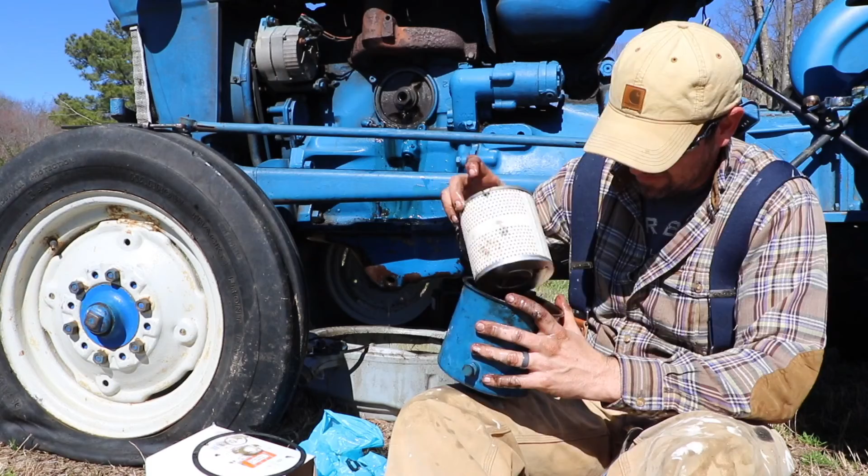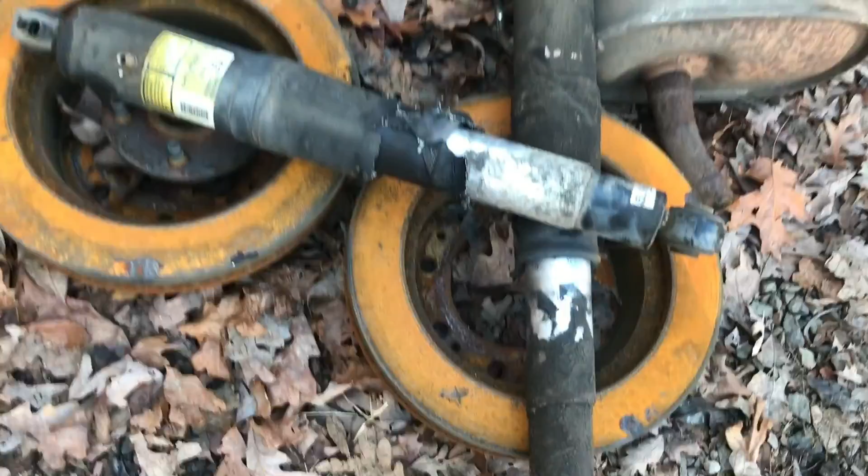That's pretty amazing. Yeah, it is. Yeah.

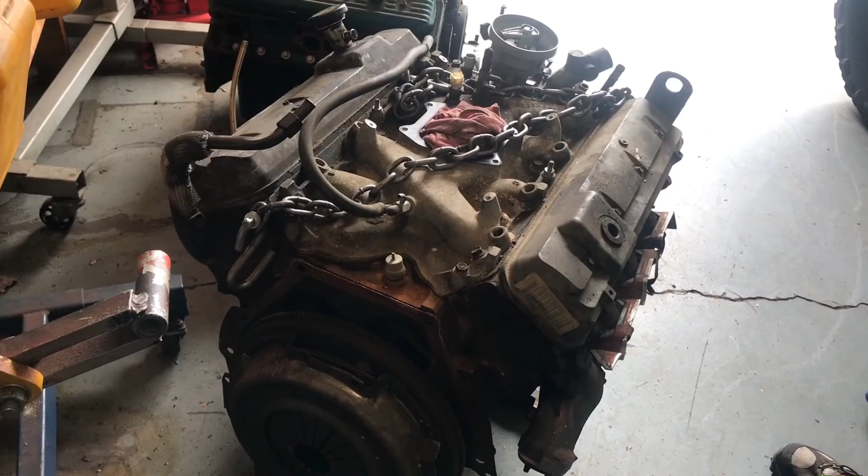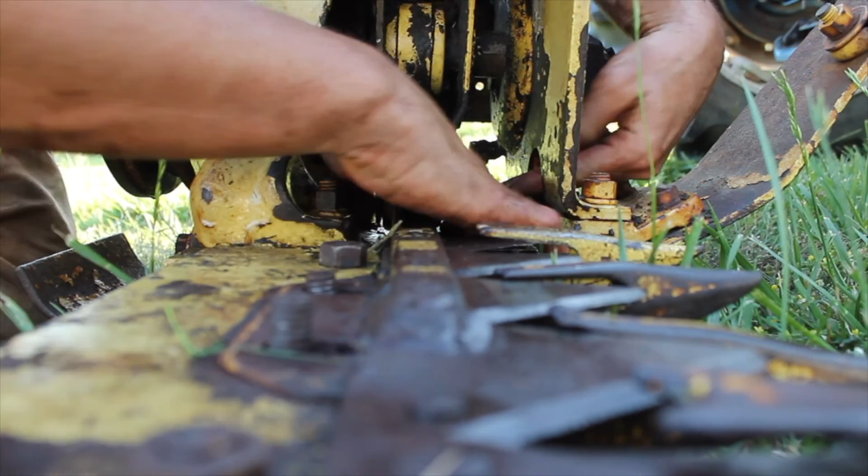Okay, put that on there. Be ready to go. It's February here, so we're going to be back into the growth season next month. We need to make sure everything is working top notch. We don't have enough money to pay for repairs or replace things, so doing maintenance and replacing any worn parts is critical this time of year.

Today I wanted to go over tractor and equipment repairs and how to find parts, because if you're like us, a lot of your equipment is from the 1970s, which predates me, and it can be very tricky to learn how to find the parts, nonetheless try and figure out how to fix something.

I wanted to go over some of the resources we've found useful in buying parts and also how we go about learning about our equipment and figuring out how to make repairs to it. I started going on Amazon to look for certain parts, and it amazed me what I could actually order off of Amazon. I didn't think you could order this stuff.

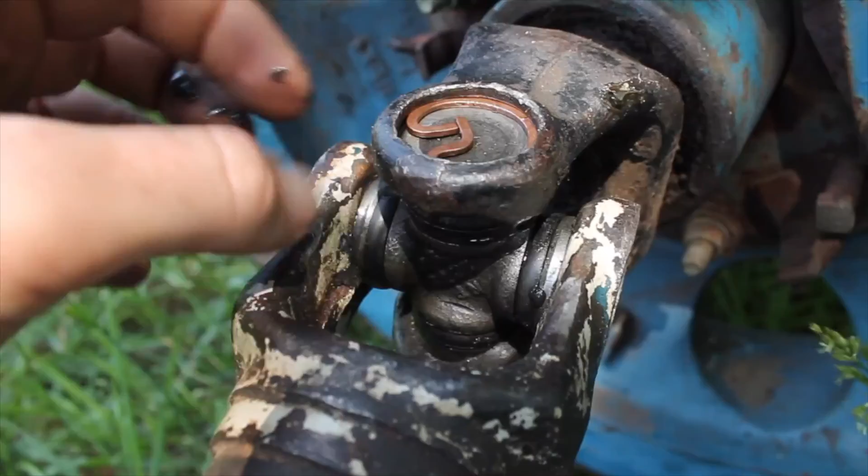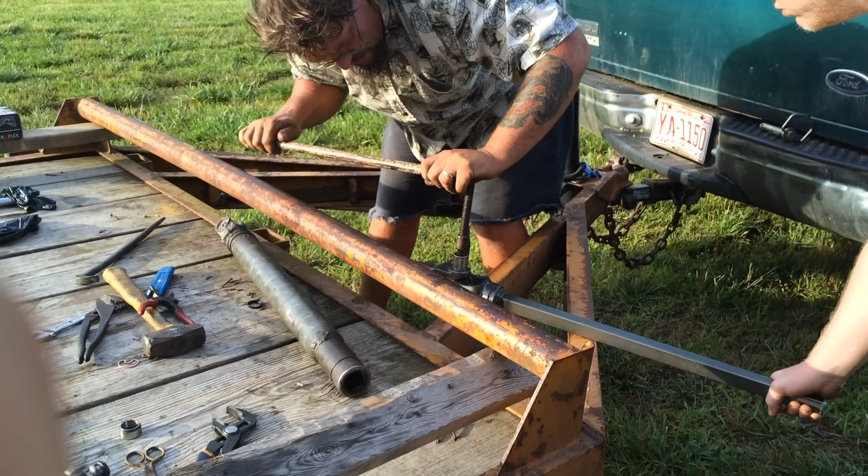For a PTO driveline shaft, we have a brush hog which I've beaten up over the years. I finally destroyed the cross bearings on both ends of the universal joint, and the yokes are a little torn up. By the time you price in all those parts, it could be fairly expensive, over $100 to make those repairs. If you were to go to your local tractor supply store and just buy the entire shaft, you're looking at $200 to $300.

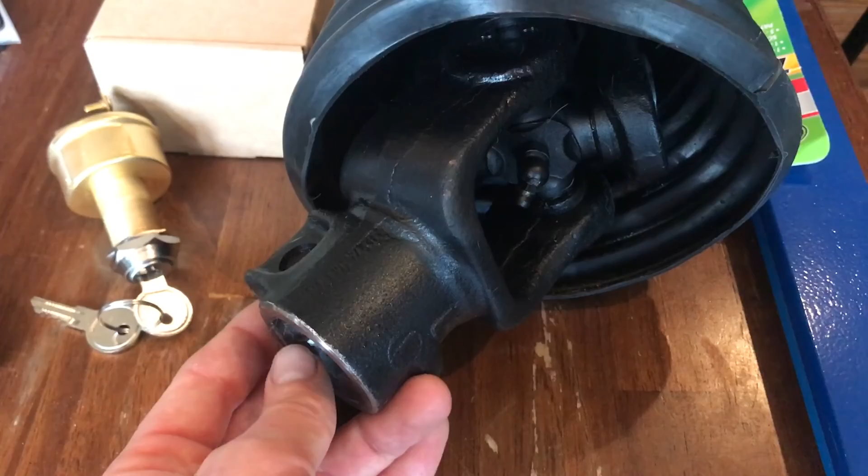But when I got on Amazon, I found one that will fit our brush hog, and it's virtually the same thing, same size, and it was only $139, which compared to what I would have spent going to Tractor Supply and buying the parts and pieces, or Agri Supply to repair the old one, it's the same amount of money and I got a whole new piece.

Stabilizer arms - I'm happy about, but not so happy about, the stabilizer arms I ordered don't match. One is left, one is right. They were from the same company. This is actually the one that I thought I was ordering, which is more of a universal bar. You don't always get what you think you're going to get when you're ordering off of Amazon.

The other thing we got off Amazon, and this I would have figured you could have gotten off Amazon, a tire patch kit for $5. A Ford tractor PTO seal - this is literally right around $10, maybe less on Amazon.

We also ordered an oil filter through Amazon. It comes with new gasket seals. This whole little kit here by Fram, $12, Amazon.

Our chainsaw has been broken. The carburetor is no longer able to hold its pressure. They wanted over $100 to repair it. We got this whole kit with the carburetor, all the necessary pieces to fix it. It even has a little adjustment tool. But this entire kit is about $25.

We're not just going to Amazon for tractor parts, but we're also getting stuff for our chainsaw.

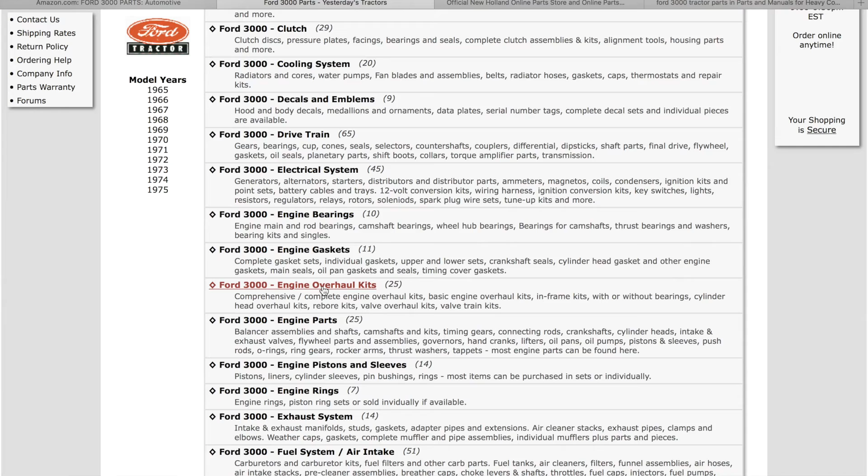Now, another website that I go to for parts on an older tractor is a site called Yesterday's Tractors. It's got tons of information on older tractors. You can get the original shop manuals for most of the tractors - for old tractors, that's why it's called Yesterday's Tractors - they carry hundreds of aftermarket parts. I mean, you can't go wrong. They've done a great job of putting together their catalog. It's very easy to use. It's not going to be as cheap as Amazon, but you can order from Yesterday's Tractors with peace of mind that what you're ordering is going to be the right equipment for your tractor.

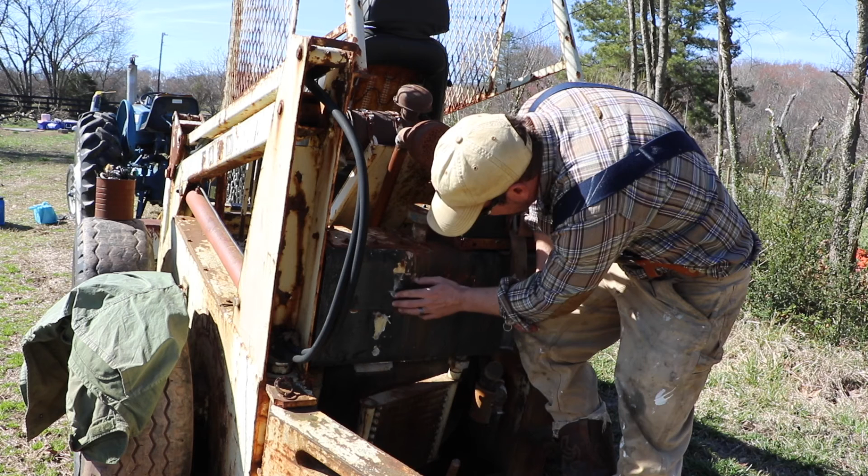Another thing, and I just figured this out trying to find information and parts on a Ford CL 340. They made those between 1971 and 1973, a very short period of time. I was having a really hard time, and I've used this other website several times. I haven't actually ordered parts from it, but I'm able to find the parts I'm looking for and find what the original part was, then figure out what parts have replaced that original part over the years, and track down the best parts that I need for it.

If you have a piece of equipment that isn't listed on Yesterday's Tractors and you're trying to figure out what that random piece is, the site is called partstore.agriculture.newholland.com. This is for Fords, New Hollands, anything that's kind of been under that manufacturer's umbrella. The older Fords you get most of their parts nowadays through New Holland.

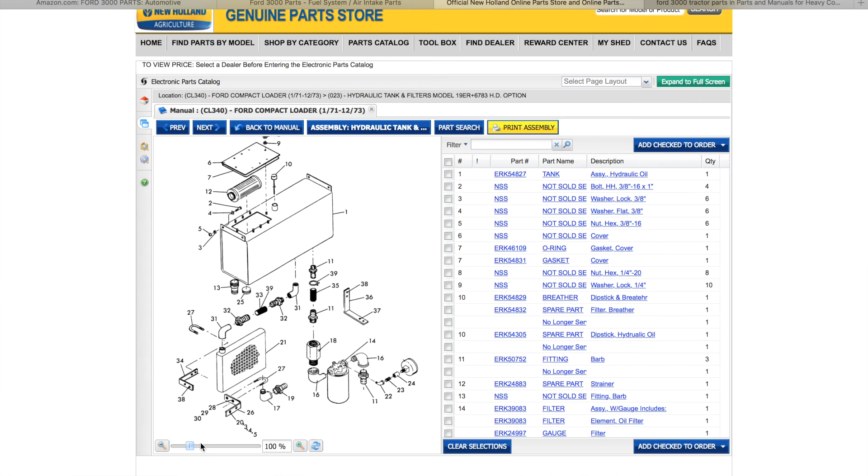If you go onto that website, they have very detailed diagrams you can go through and pull up, whether you want to see the engine parts or whatever part it is you're working on. If you don't have a shop manual but want a good idea of how something was supposed to be built, because a lot of times these machines have been modified, you can go onto that website and pull up entire diagrams of whatever section you're working on.

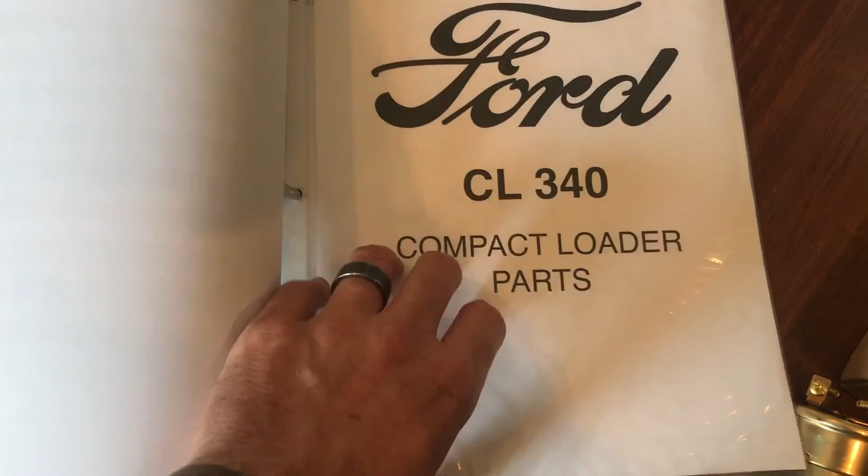Decipher which part is which, how the system operates, etc. If you haven't already done so, and this is something I just started doing, I have a binder with our main pieces of equipment that we use on the farm. This is Ford, so in here we have the 3000, the CL340, and our 1993 F250. I keep anything I'm researching to repair, or shop manuals, in here so I can always skim through and find parts.

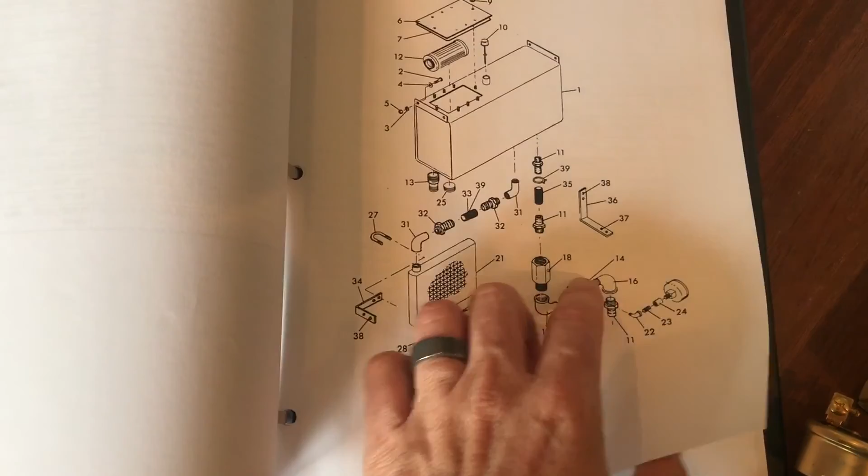On the New Holland website I mentioned, where you can find parts diagrams, I keep diagrams of areas I feel I'm either going to be working on or need to work on, all in here so I can easily flip to them. I don't have to worry about having Wi-Fi outside to look something up on my computer. A little old school that way.

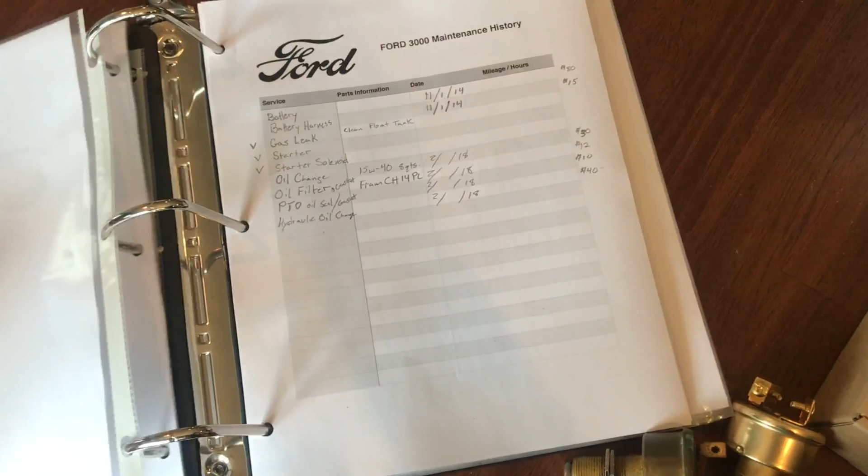I also keep work logs of anything we've done to any piece of equipment, the date we did it, what parts were used, to help me gauge upcoming maintenance, what something's going to cost, where I found the part, and what part number I used, because sometimes we're using parts that weren't original. Keeping your own manual that you're building as you do repairs is kind of an essential thing.

The other thing I'll do is put down the date, the cost, any information I have on parts, what the repair was, and since we do videos, if I did a video on it I'll put a V next to it for my reference, so if I have to do it again I can go back and see what I did, because a lot of times I'm just figuring things out. I don't really know what I'm doing.

The other thing you're going to need if you're working on your own equipment and you're not a mechanic is shop manuals. This is a Ford 3000 shop manual. The I&T shop manuals, like this one, you can sometimes get at Tractor Supply. This one came from Tractor Supply. It's a Ford 3000, a relatively common tractor. Even though it's from the 1970s, a lot of people are still running them.

There's another website I like called gensales.com. That's where we found the CL340 manual, which is a rare machine as far as finding parts and manuals for us. Gensales has a shop manual, and then if you go to yesterdaystractors.com, they also have, for a lot of tractors, the original shop manuals.

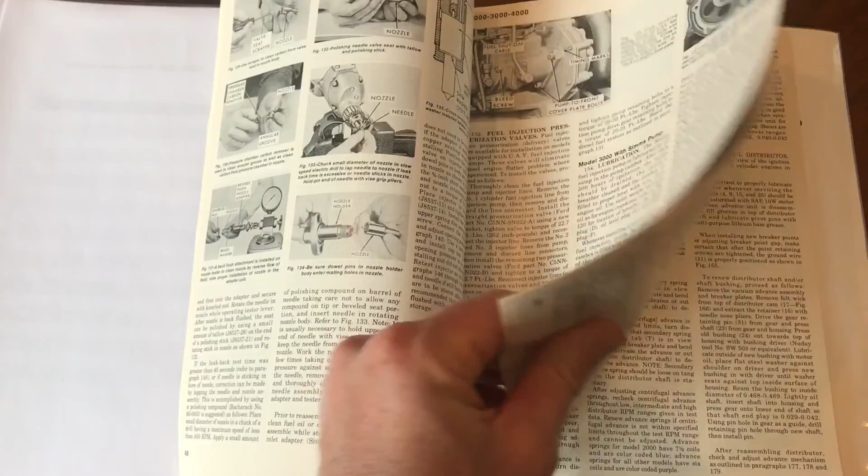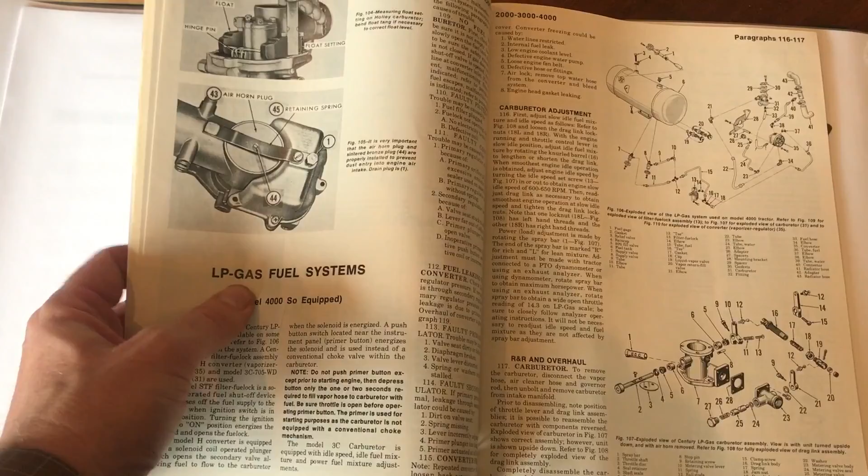The idea of a shop manual on these older tractors and equipment is to help you understand the function of the tractor, the function of the different areas, which should help you figure out how to make repairs. The parts diagrams on the New Holland website will help you find, locate, and identify the parts, and the shop manual will walk you through the rest. At Tractor Supply Company and Agri Supply Company you can get parts there too, but anytime you go into a retail store, those parts can be a little costly.

Tractor Supply Company and Agri Supply Company are specialized stores, so sometimes you have to go in there because you're looking for a tractor part and you need to have it right now. You can't wait for it to come in the mail. Expect to pay a little more for that.

Advanced Auto Parts, AutoZone, Napa Auto Parts, a lot of those places carry parts as well. Napa may have a wider selection than Advanced Auto Parts and AutoZone for tractors and random pieces, because NAPA sells parts for all sorts of equipment.

Another place that you can look besides Amazon, if you're going to go online, is you can check out eBay. You can look at Craigslist and Facebook Marketplace for used parts. I have bought used parts before. I buy used equipment. As long as it's in better shape than what I'm replacing, sometimes that's what you have to do.

Another place that I like to go to look for parts and things are auctions. You can go to estate auctions where there are farms and other things, and a lot of times they'll just have lots full of parts and pieces because farmers keep their parts and pieces around to make repairs to their tractors. Definitely check out local auctions.

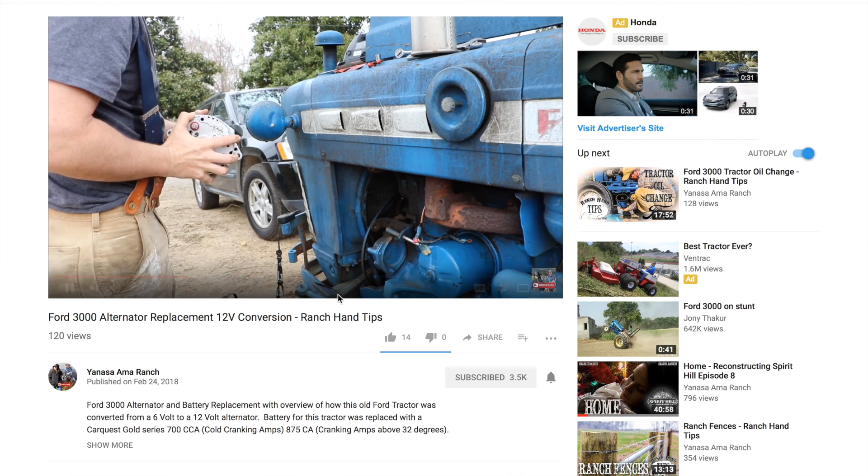If you're more of a visual person and reading information in a chat room isn't going to help you, I would highly suggest you turn to YouTube. There are a lot of people out there on YouTube who come across as experts. None of us are experts, so if you're watching a YouTube video on how to do something, I would listen to how they found their parts, why they're using the parts that they're using, and then I would refer back to your own shop manuals and parts lists to make sure that that is what you need.

Something I have discovered with some of this old equipment, not every piece of equipment is the same as the other. Especially with older equipment, you also have a lot of modifications that have been done over the years. Just because somebody is doing a repair video on a piece of equipment that is the same as yours, that doesn't necessarily mean that the parts and the way you're going to be repairing that is the same as yours.

Definitely use YouTube. You're watching it right now. Keep in mind that not everybody knows what they're doing on YouTube. A lot of it is just do-it-yourself videos like ours. We're learning as we go. But you can learn the process in which to think through and make a repair from watching a YouTube video. Combine that with your shop manual, combine that with your parts diagrams. You can put the whole thing together.

If you're new to this, like we've been new to it, and you're trying to figure out where to find parts, how to fix something, I would utilize all of those resources. Do your research before you start your project. It'll make things 10 times easier. Spend some time looking it up, have some fun with it, put together your own kind of shop manual for your equipment so that as you go back and do repairs in the future, you don't have to redo all the research. You've put it in a format that makes sense to you.